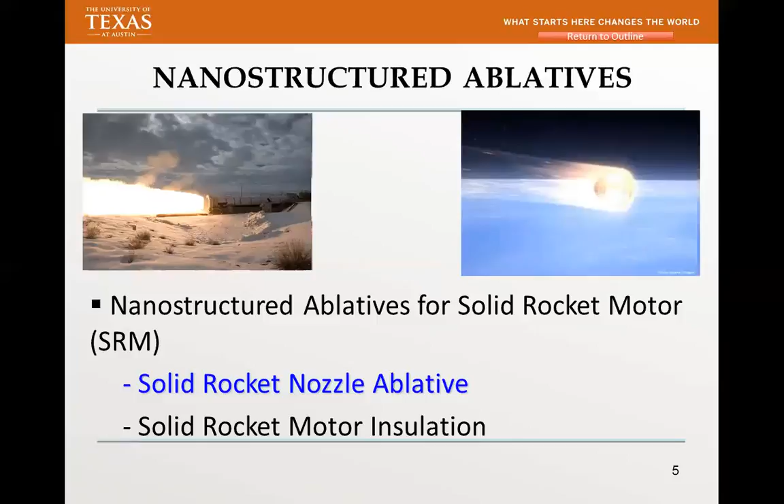These two research grants or contracts actually came from Air Force. A lot of my research has been funded by AFOSR - probably Pierre knows about it - and AFRL. They've sponsored a lot of my research for the past probably 15 years.

I'm going to give you some examples. We were developing a new class of nanocomposite for rockets - for rocket nozzles - and AFOSR funded my company to do that. The whole idea is, can we change the phenolic resin with very low loading of these nanostructured materials and use rayon carbon fibers to make a new material. That's the reason behind it.

Since I've worked in industry all these years, I work with Cytec Engineered Materials - we have the formulation and send it to Cytec, and they will scale it up. Cytec is now owned by Solvay. So what we do is everything in the lab, and we work with other companies that do the business of scaling up. That's the approach I'm taking - I buy all the materials off the shelf and formulate something nobody has done before.

If I do everything in the lab, who's going to take it over? The companies - Cytec Solvay is the biggest company in making ablatives. We have a very good relationship with them. Right now, this is one of the projects, probably from about 12 years ago.

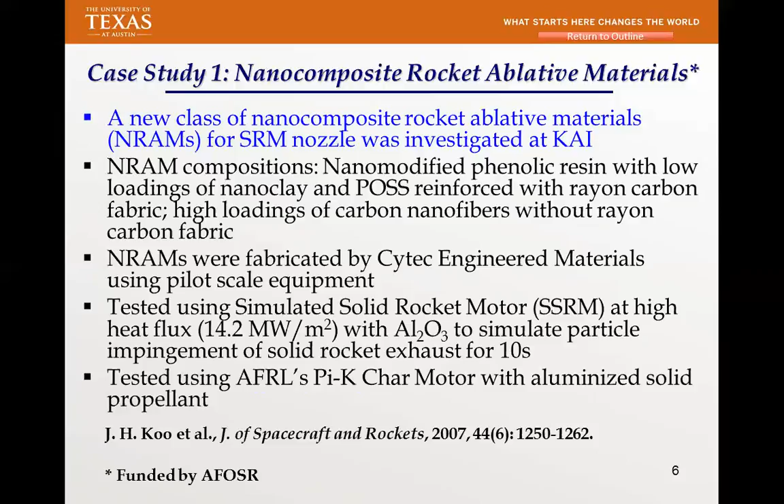So the important thing is we actually formulate resin, reinforcement, and filler. These are the different formulations we come up with using a phenolic - phenolic is the traditional material, actually made by Cytec. We always use a control, and then we change the filler using clay, using POSS, and also using carbon nanofibers. Those are the things we're working on.

So this is all done - all done at Cytec. We give them the formulation, and they will make it.

So we don't have what we call a scaling problem. If Cytec could scale it up, they could make us a product. That's kind of different between my research and a lot of my colleagues. I always find an industrial partner to make our formulation.

Okay, I want to concentrate a little bit on what we call significant results. You can see I have four plots here. Density is the most important thing in all the material that we develop, because you have to put it in rockets, certain things. If you have a very high density material, you're not going to fly, period.

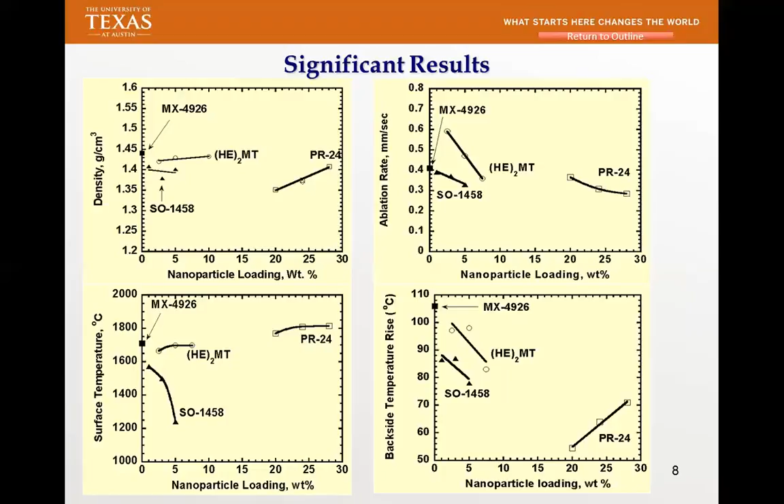Another one, we publish a lot - that's why you could actually find these citations. This one is also jointly funded by AFOSR as well as AFRL in Edwards, California. The first one had to do with rocket nozzle, the second one had to do with insulation. So we started actually using material - these materials came from Bayer, the thermoplastic elastomer, and then we use the clay, came from industry. We also use multi-wall carbon nanotube, came from Arkema.

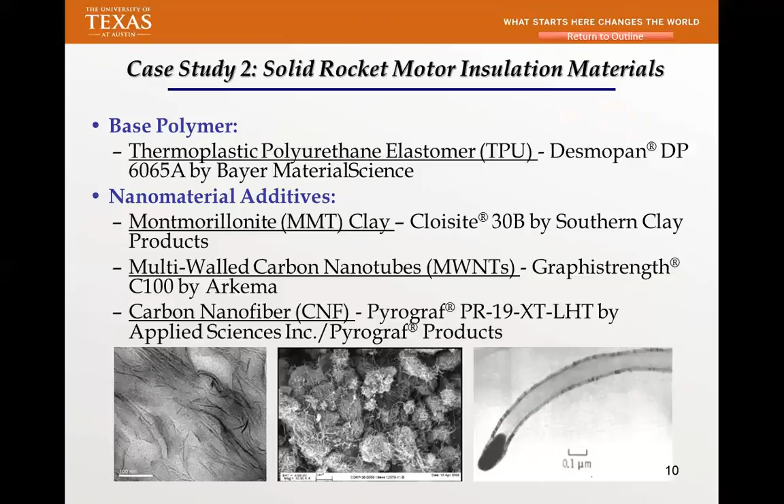We use carbon nanofibers from a French company that came from applied sciences. So that's what we did, and we compounded using twin screw extrusion. We have all these different loadings because we don't know which one is better, so we actually had to do a loading study from 2.5 all the way to 10 with these different nanomaterials.

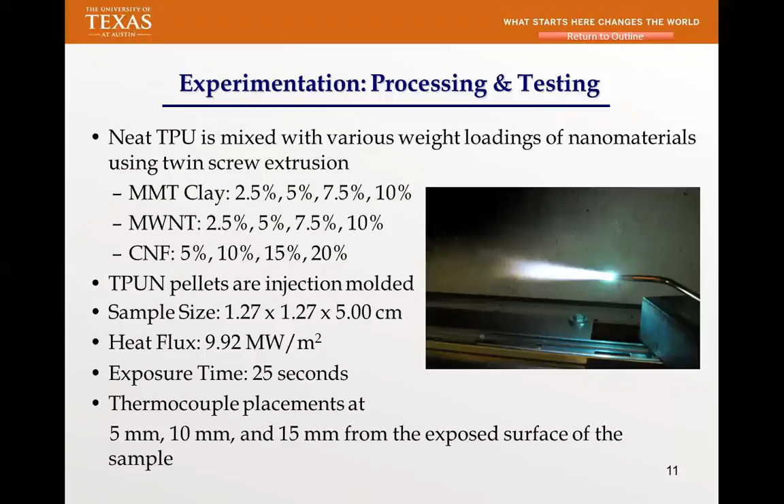After we compound all these, we test using a very high heat flux. This is our own first generation oxy-acetylene torch that we use, and we were placing thermocouples at different ends to get the temperature gradient during the test. I'm trying to show you some data, but I'm not going to explain the data in detail, I'm trying to show you the methodology, how we solve a problem.

We collect all these data and start looking at recession. Of course, the lower the better. We know the loading, and we plot everything, and find out which one gives us the best ablation resistance. That's one thing we look at.

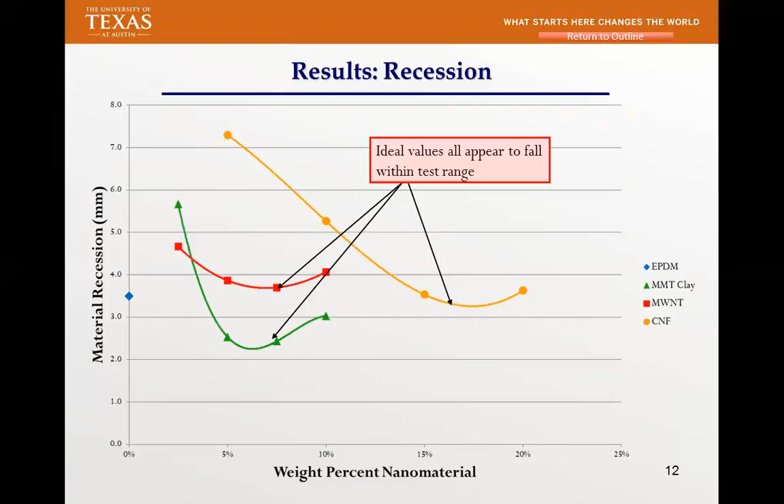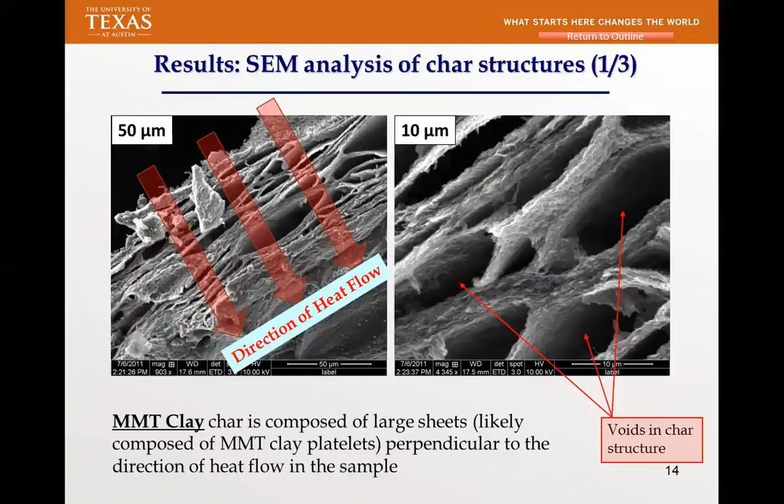We learn it from SEM for the post-test material. So this is what we saw for char structure for clay. The difference is they actually have all this clay that will stop it. Clay is ceramic, and it works really well for ablative.

Next one I want to share with you is multi-wall carbon nanotube. It's very different in terms of structure from clay. This very small multi-wall carbon nanotube is roughly 20 nanometers in diameter, so you form what we call a carbon network, while the other one actually forms a ceramic shield. Very different mechanism, and that's how it really worked for the ablative we developed. This one is actually 10 microns, and this one is even higher magnification.

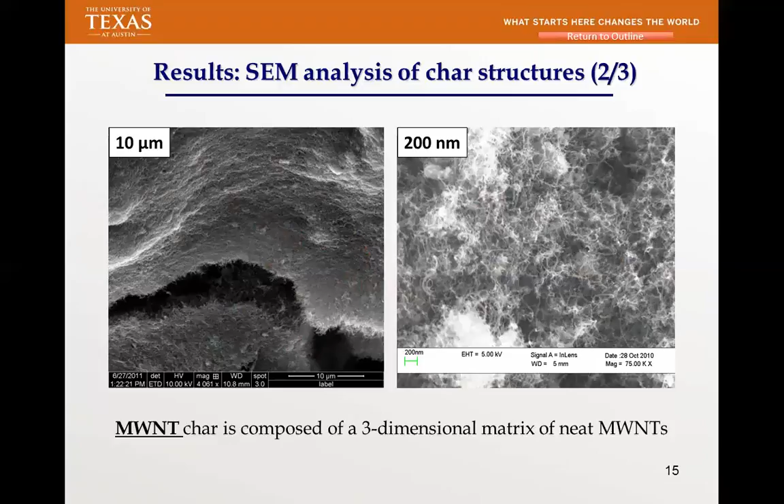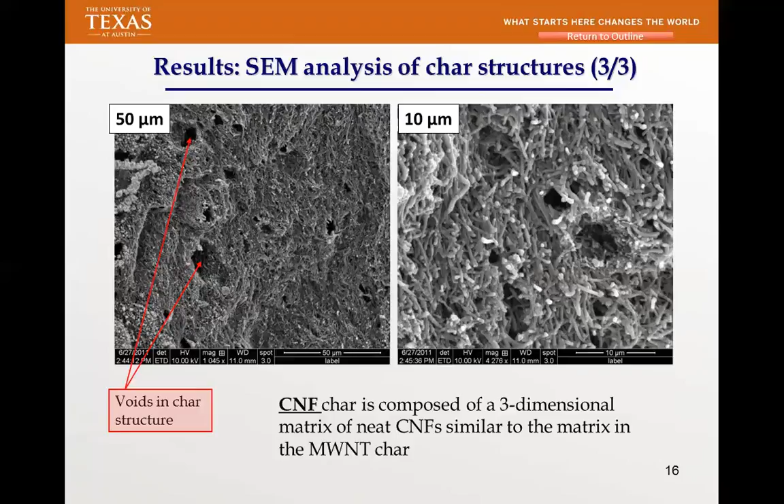So next one I want to show is... underneath here, this is carbon nanofibers, 150 nanometers in diameter. You can see there's also the mechanism of a carbon network, but they're bigger, 10 times bigger. That's why we look at, examine the structure and learn about the mechanism. That's what I tell my students to do. Once you learn about the mechanism, you could actually solve another problem.

Once you learn about the mechanism, you could actually solve another problem. Well, this is actually very new, this has just been published.

This is some work that, and I need to brag a little about it, this kid is an undergrad, he just graduated under me. He was able to write a journal paper and it's been accepted. That's how I work with my students. Of course graduate students are important, but some undergrads are phenomenal. I worked with him and he got a paper published, just came out last month in the Journal of Spacecraft and Rockets. So he did that.

We were looking at experimental characterization of a new material using a resin that is polysiloxane, and using silica. So that's what we did, and this has been published. I'm showing you the methodology, how we start from the lab all the way to testing.

So why are we doing that? Because it's for TPS, thermal protection system. This resin was developed by a company, they came to me and said they would like me to make this material into a thermal protection system. So we did all that, and that paper became a marketing tool for them.

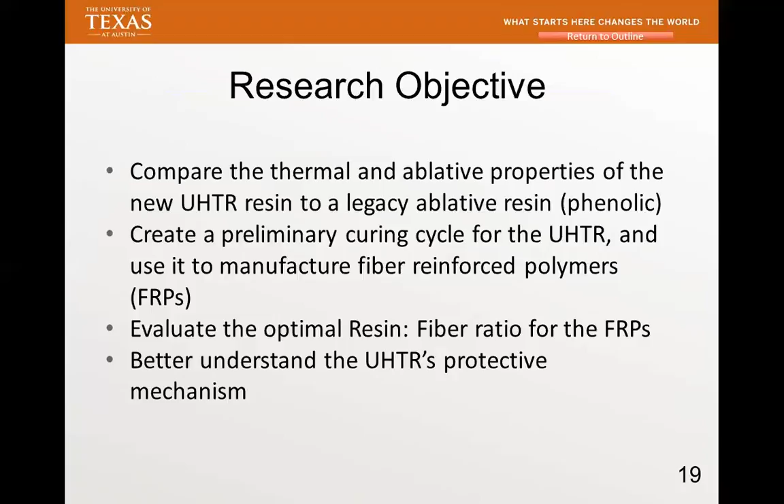So this is what we did, and we compared with silica phenolic, which is a material that has been around for a long time, also made by Hexion. We always have what you call a control, because if you mix something up, how do you know it's good? It's not that Dr. Koo said it's good—you need to compare everything in industry. This particular material has been around for 40 years, so we compared with that, and we were able to make it in our lab as well as get the material from Cytec.

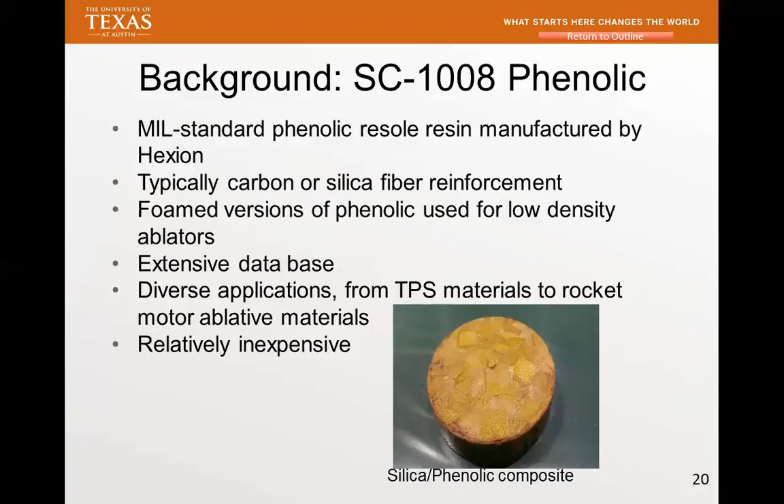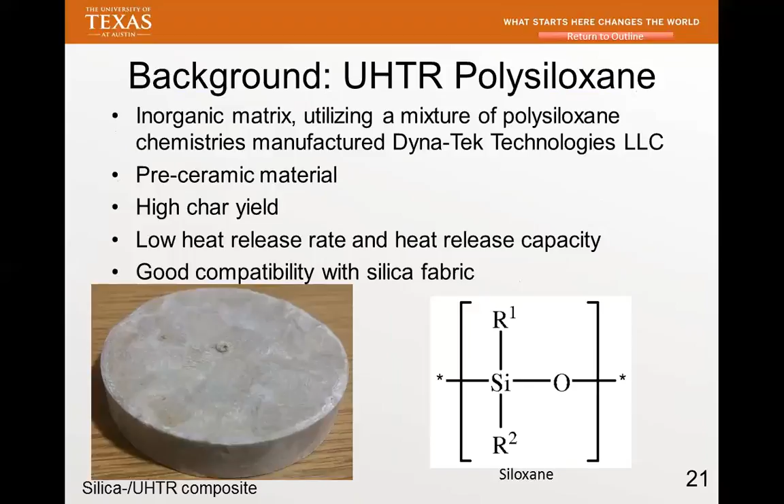These are the structures of the silicon polysiloxane, and this company provided material with very high char yield. We'll use the same methodology I talked about earlier: TGA, look at the char yield, look at the MCC, and look at heat release rate. We'll actually measure density, and the difference is we will also use an oxy-acetylene torch to find out ablative properties as well as performance.

And we compared every one of those that we got from the industry, so then I know. Take a look at this char yield—take a look, this char yield coming from phenolic is lower than this particular resin. Using the same definition, it's 86%, substantially better. Char yield is only one thing that we look at, but if you have a high char yield, you're going to actually maintain your ablative performance. So that's what we start looking at.

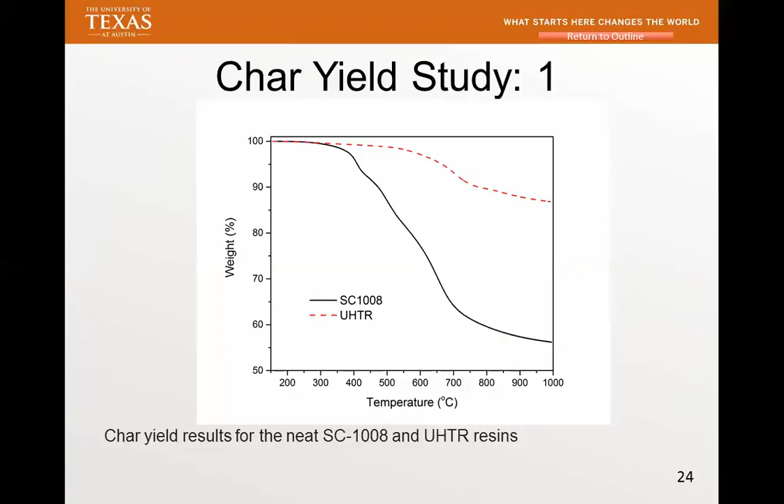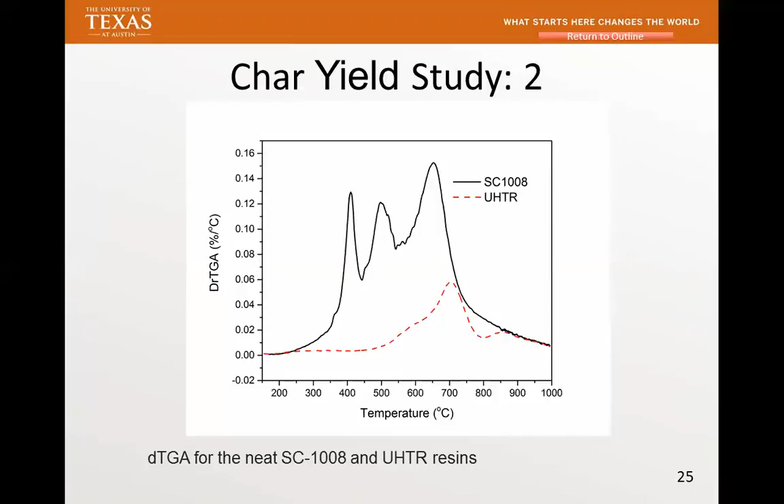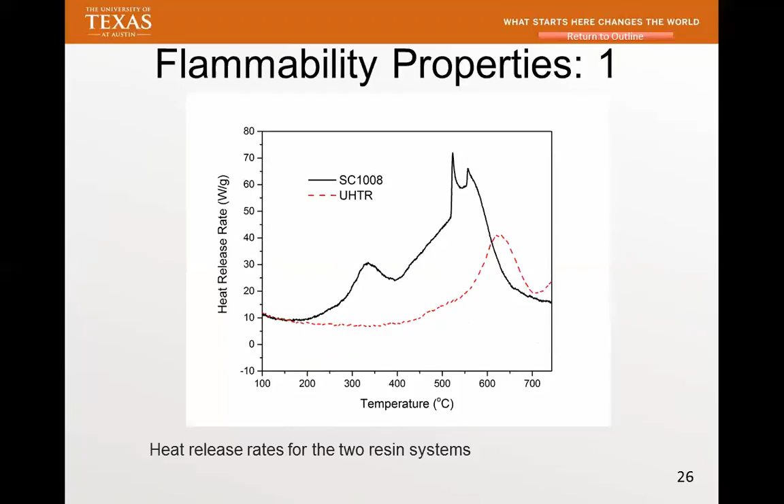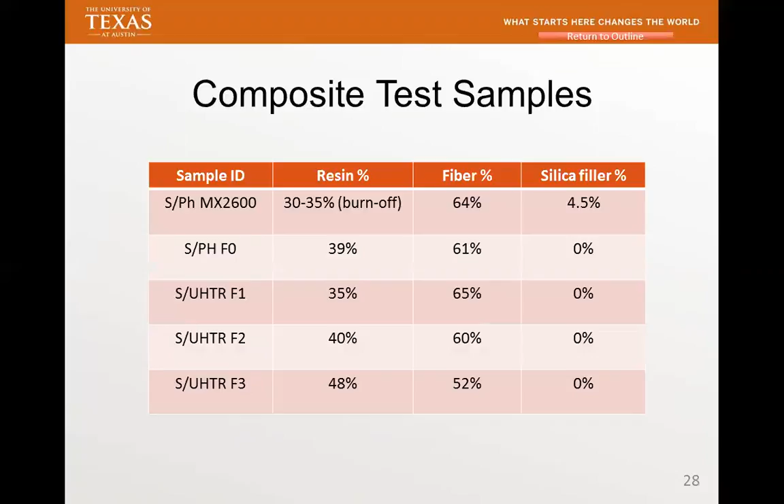So these are the ones that we are doing in the lab. And the density—well, it's showing that all of these have lower density than the control, MX2600. So if we have a low density with better performance, you have weight saving.

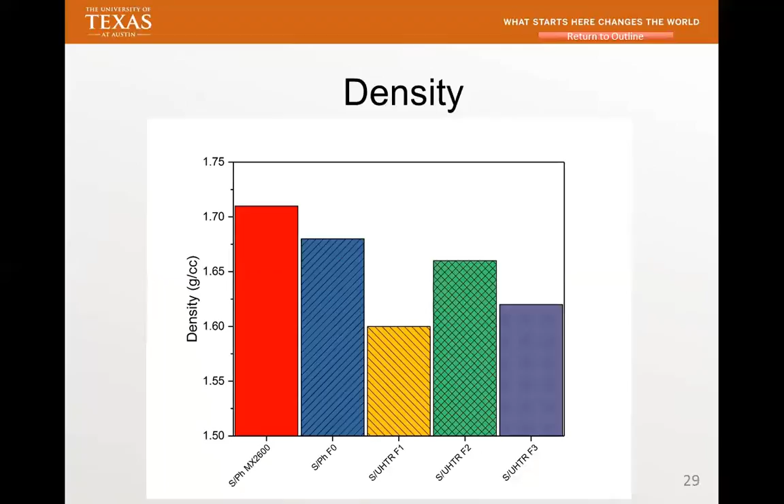So we do TGA—first I did it for the resin, now we're actually doing it for the composite. Take a look at the composite—it is very, very high, 97%.

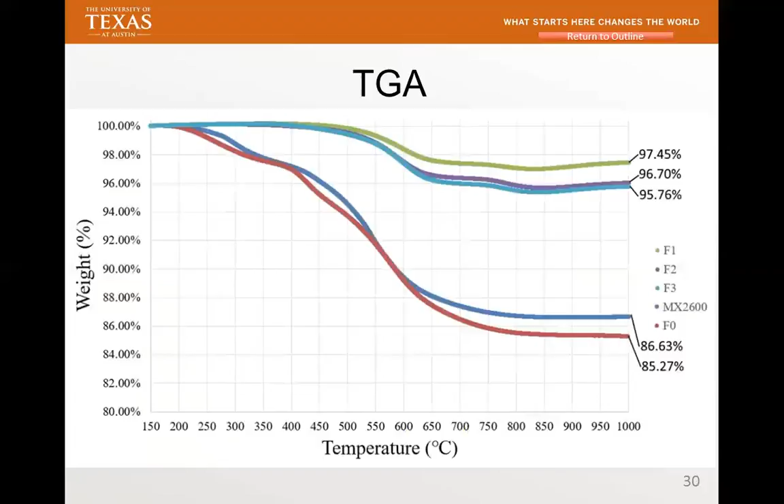That's extremely high. So this is what we do using the oxy-acetylene approach. We calculated the fuel ratio as well as measured the heat flux using a Gardon gauge, and we expose it using 1,000 watts per cm squared and a set exposure time. We have a carbon shield blocking the flame wrapping around. So this is what we did, and this is all presented.

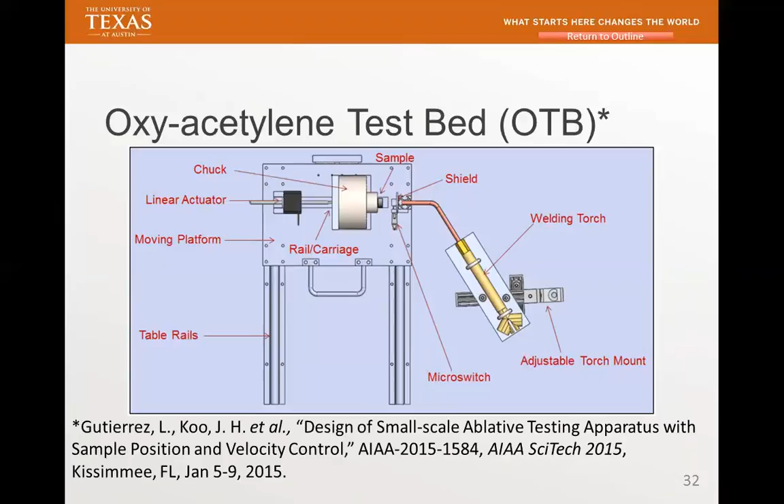These are my K-team capstone team who designed all these, and as every capstone project, we present a paper. This was actually done in 2015, and it was presented as an AIAA paper.

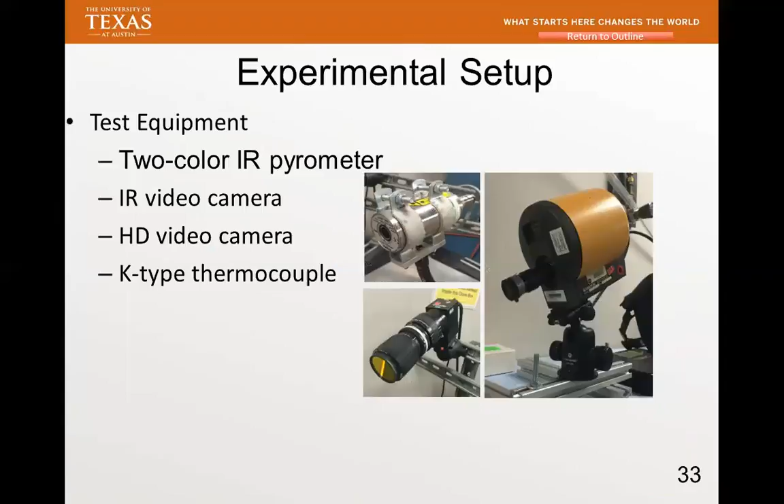We have these instruments that came from NASA: an IR camera, a high definition camera, and a two-color IR pyrometer. We examine the surface of each one, and this is how it looks before and after.

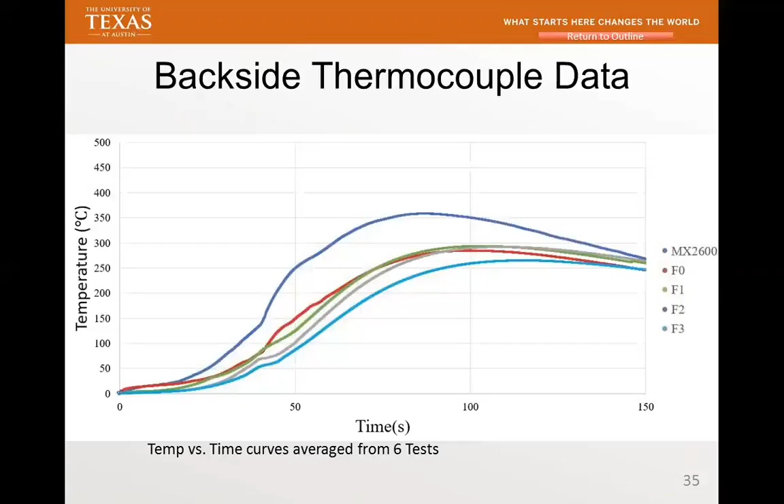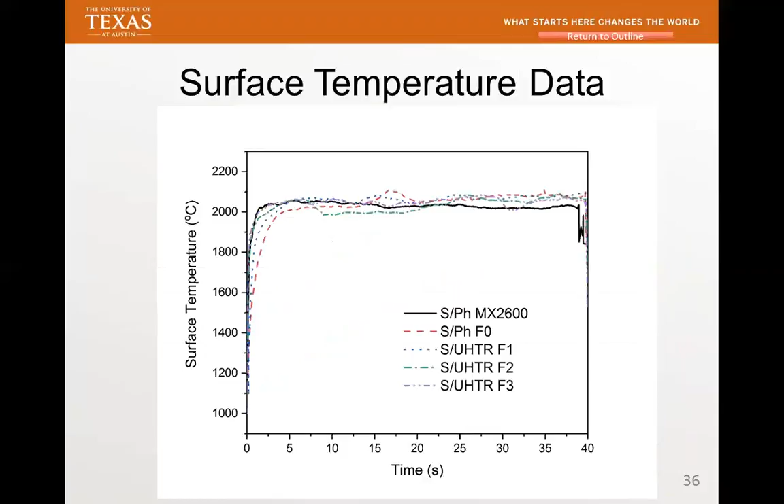We have a two-color pyrometer, so emissivity is not an issue - they cancel each other out. This is what you see, very high temperature, 2,000 degrees C during the test. And this is the recession rate.

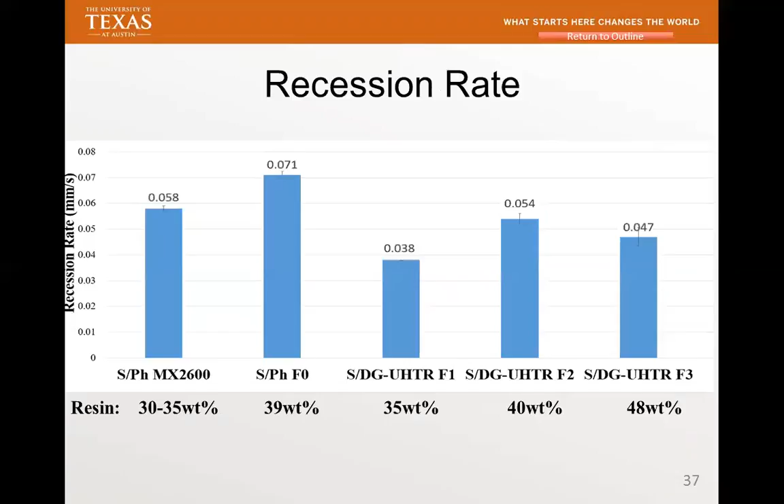Lower is better. You can see that this is actually the best formulation we have compared with the industry standard. Heat soak temperatures are all lower than the industry standard. We also measure the mass loss, all of these.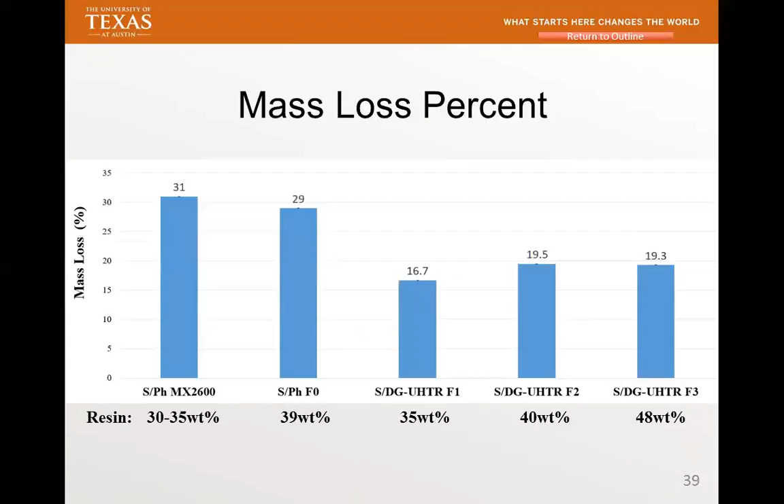That's what we call developing a methodology. If every student follows this methodology using a different material, they get an answer. That's why we have numerous publications, because we develop methodology - this student uses this, another student uses that, but they're using different materials. We have all the capability in our lab to do ablation as well as flammability work and mass loss.

Oh, this is a video. Can you do that? Somebody help me. See whether you could do this video - this video is very interesting. It's an IR video, and you could see the material versus the one that we use. You could click both of them almost at the same time. Oh, sorry.

So you're seeing this is the one for IR, the surface. The different colors will tell you how hot it is - in the middle is the hottest. Now it's showing actually in power. This one is for MX, the industry standard. The other one is the one that we made - this is Formula 2.

Is it done? Oh, it's still going - you see, it's 40 seconds. Okay, we capture all that. So now it's gone.

So that's what we do, what I call advanced diagnostics - we capture all the things and we start analyzing that. And in the paper, can I show the video? I told them to just cut out all the frames so you can compare, and this is what we're doing.

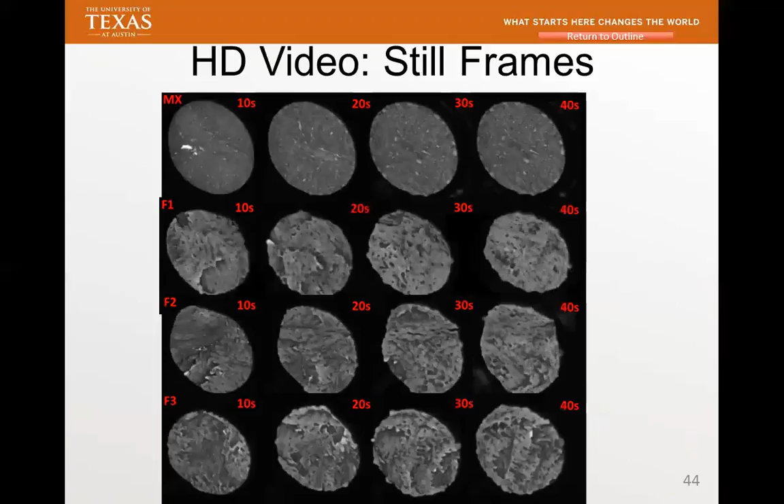All these measurements, and then we got still frames. You want to know more about it? Actually, the paper will describe all these things.

Okay, so these are the ones that we did for looking at char zone area A, B, C, decomposition area, pyrolysis area, and virgin area. This is what we did for the material, very, very detailed analysis.

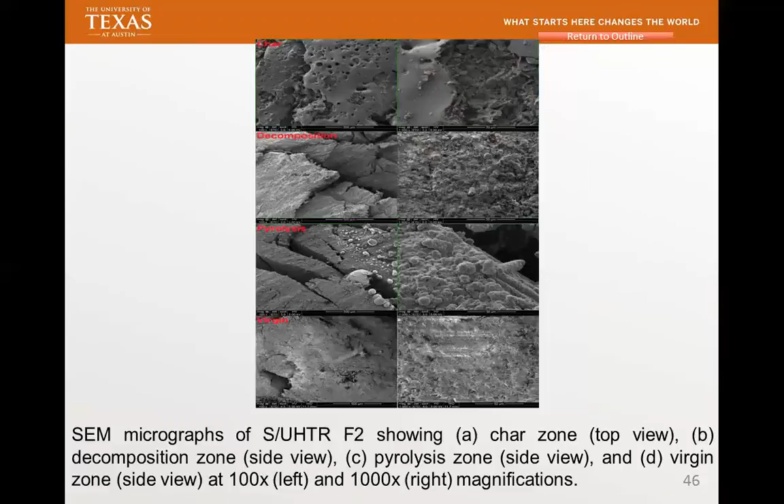And mind you, this guy is only an undergrad. He just graduated while he's working. So in conclusion, we did all these things, and that was actually a very good material. This material, I'm using for a new Navy contract. I have a new Navy contract.

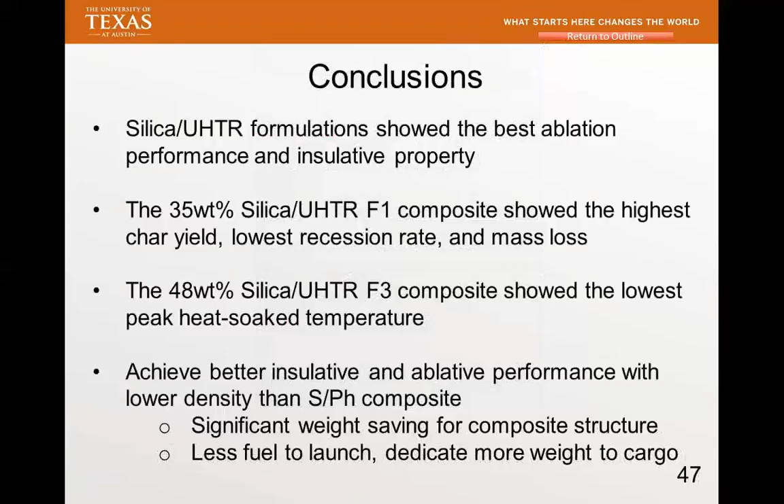This is one of the materials that we're going to use. So I'm going to talk about char yield a little more. These are different materials that we have, and that's what I call the char yield. All these materials came from the industry, came to my lab, and used the same definition. Take a look at the char yield of the one that we did, very high.

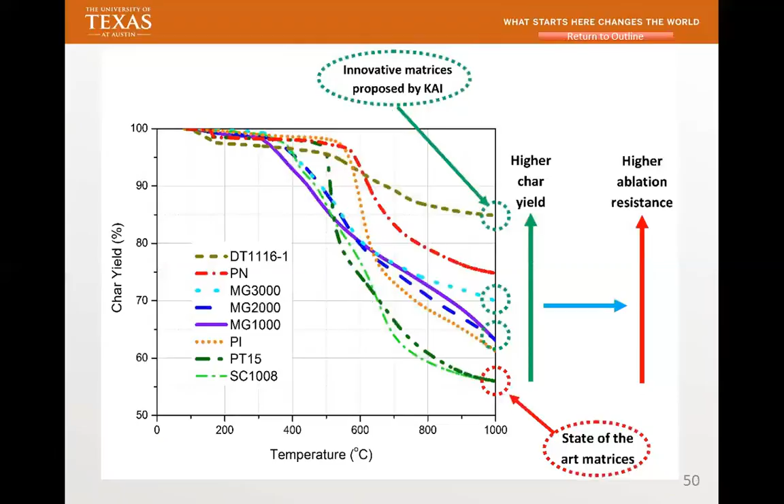These are what I call state-of-the-art resin systems. These are commercial, not somebody from the lab. I do not take somebody's developmental work. These are all I could buy. If I had the money, I could buy a truckload of these. Some of them are very expensive still, but I could buy them.

So we did all these, calculated the decomposition temperature, looked at the char yield, and compared which resin is better. The one that came up on top is the polysilicon.

So we did all that before we do all these, and then we also do kinetic calculation. We do actually TGA at different heating rates, always in nitrogen. I don't want to do it in air because with nitrogen you decouple the oxidation effects.

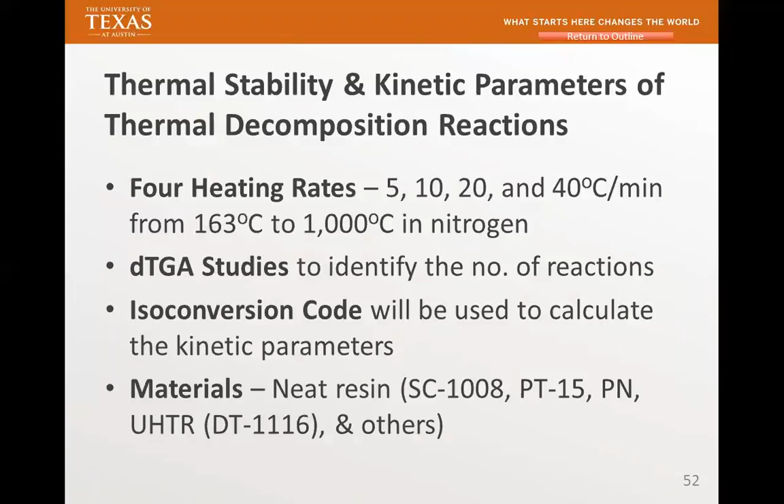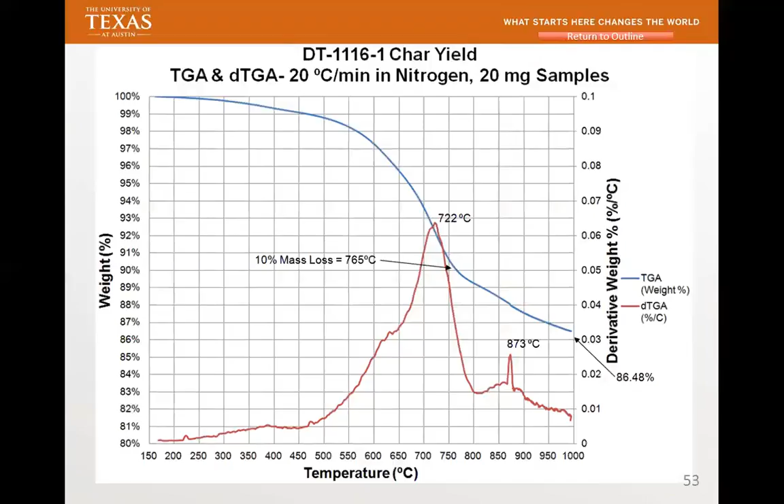Okay, you do all these, and then we fit it into another computer code that we developed. It's called isoconversion, which is actually used quite a bit in academia. And we come up with all these, and we plot all these, and every one of those was actually done for my lab, by my students.

We calculate all these, and then basically we do experimental work. Now we're doing a little bit more theoretical work to understand.

I think this is interesting because Jonathan is also actually an undergrad. So I'm going to show you some of the things he's doing. The two materials are actually supplied by NASA, PICA, and Avcoat.

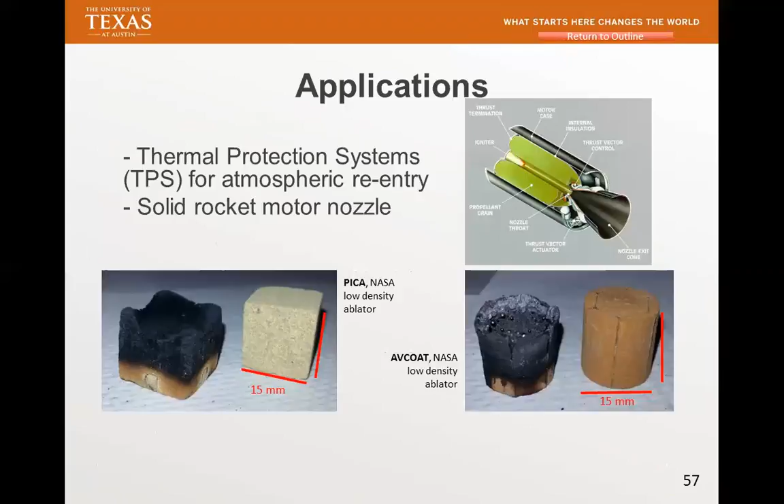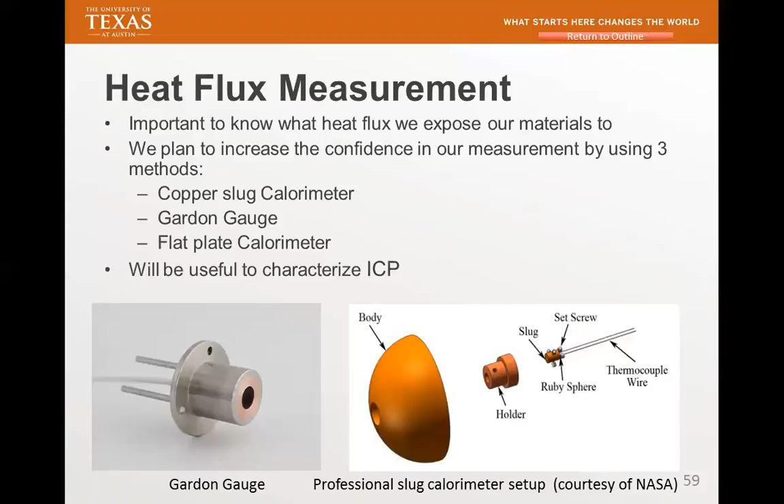We have this thing, and we measure using different calorimetry. The one that we depend on a lot is the Gardon gauge. We plot it and look at the heat flux versus distance. From there, we use that particular distance and test the material. So we could go up to very high heat flux, or actually low heat flux.

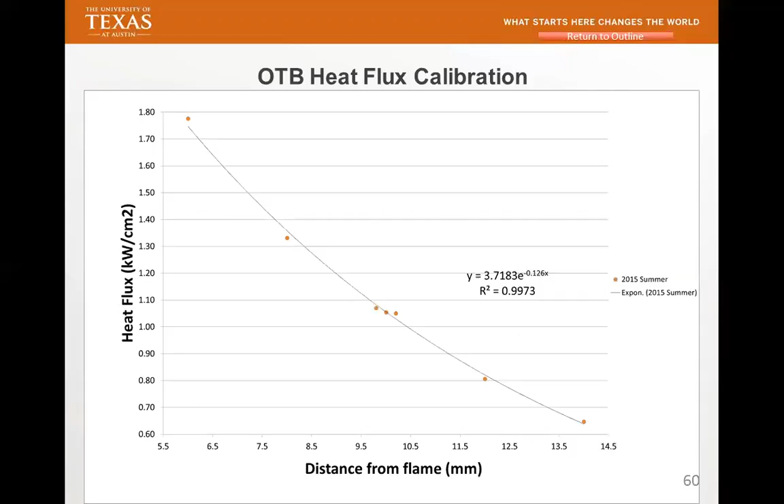We measure all these. This one, can you show the video please? This is actually quite interesting. It was all done by undergrads. So one side is the high definition, the other one is IR. You could compare it, all the frames.

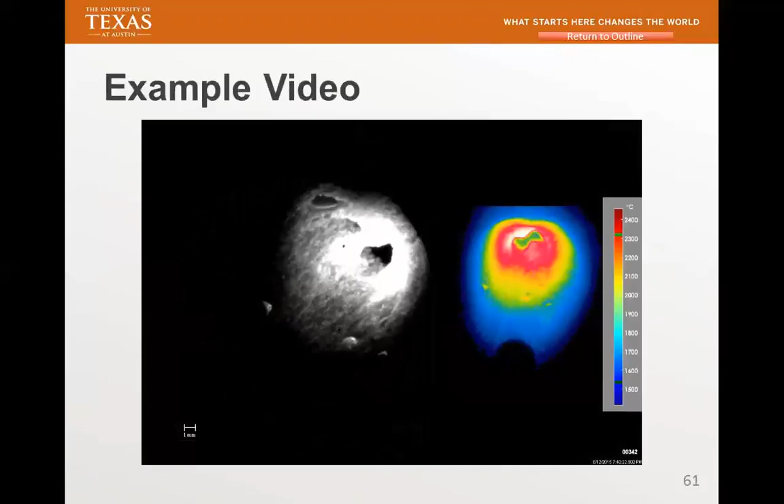Okay, so we did all these, and this is what we call an in-situ sensor. I'll give you another little section on this where we designed it. It was funded by AFOSR. It's also basic research. We develop all these and use them in our research.

So what I'm doing is getting funding from different agencies. They pay me for this, pay me for that, but I put everything together to analyze ablatives.

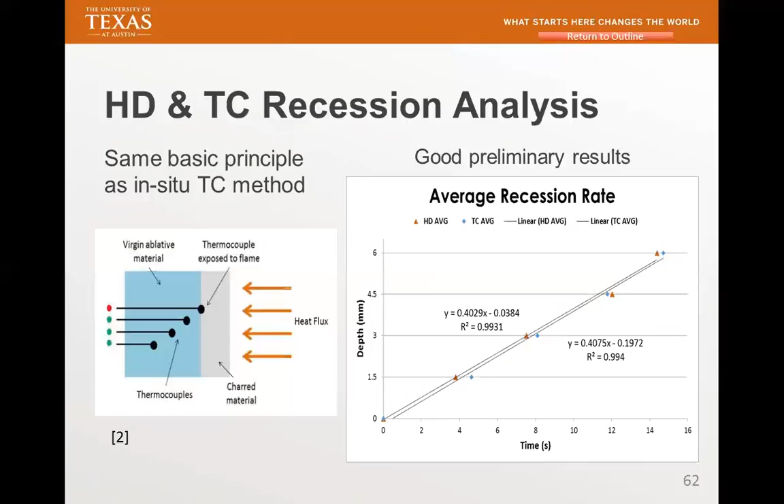So we did all that, and the same thing, we actually use IR to calculate all these. These are different platforms that we could look at. They came from NASA, actually the IR pyrometer.

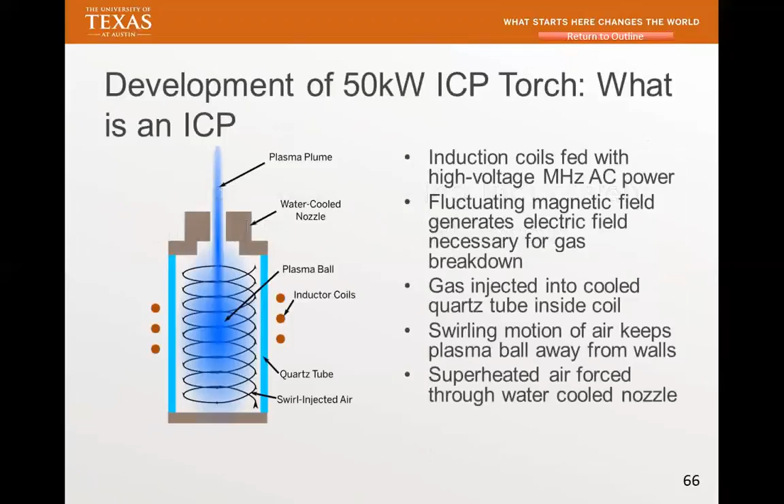So this one is very interesting. This one is called ICP. It's funded by NASA Johnson. It's actually now at UT. Basically, most people use ICP to do re-entry vehicles. So Johnson funded us and my colleague in the aerospace department to actually build this whole system.

Okay, and this is the ICP. It's currently at UT Austin, and we are now using that to test the NASA project. So these are the instruments. Everything starts from ground zero. We were able to do all that.

I'll give you a video. Okay, go back. How can I get the video? Please. Okay, this is the flame now. Self-explanatory. This is actually a PhD dissertation.

So here's a flame. We're heating the air using induction coils.

And you will see all these instrumentation, and then later on you have a swing arm and swing your sample in there. Okay, I borrowed this actually from Benton.

He's defending his thesis this Friday, and I said you pass. Don't want to call in at 1 a.m. in the morning to sit in this station.

Okay, so this is the flame, and you'll see a swing arm coming in right here, the sample.

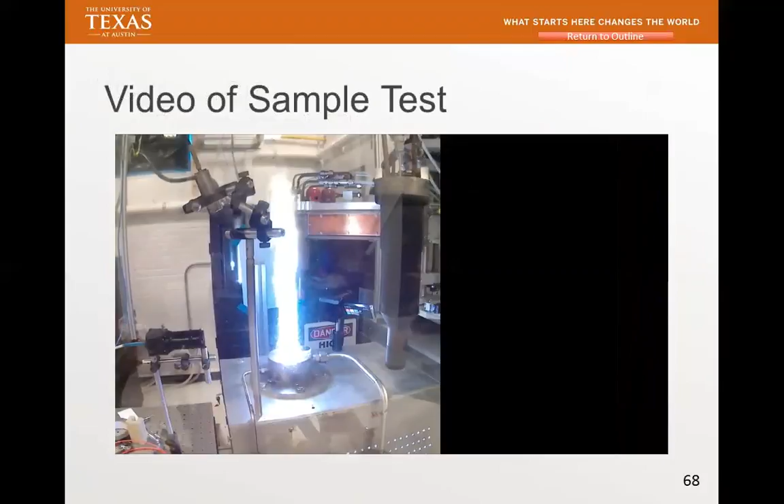Something is missing. I think the video, something is missing. Is it come out? Can you play back? Because you're supposed to see the swing arm swing in, okay, and you see actually the sample in the flame and then swing out, and you see a lot more things.

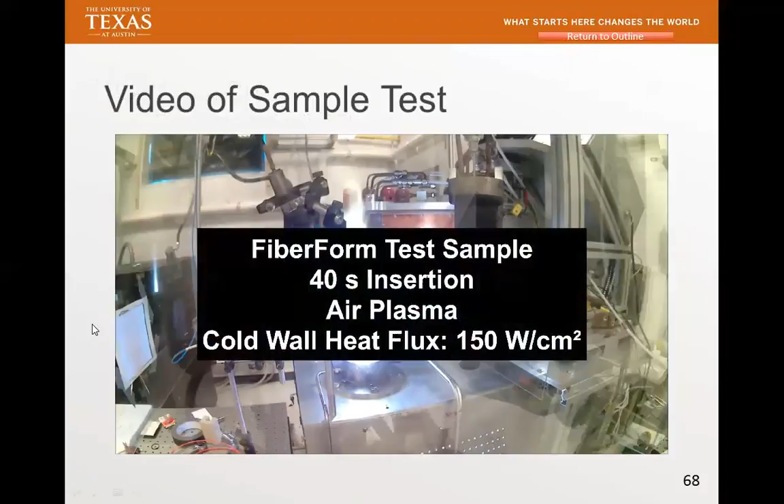Somehow, because the swing arm was designed actually by NASA, so you make sure that the flame is steady state, and then you swing in the arm, you will be able to capture using actually this, using the optics in there.

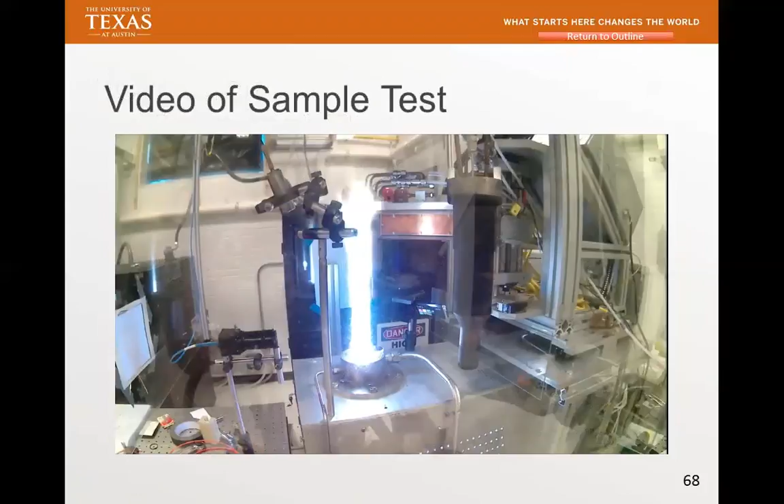Okay, but this is what you do. We have a swing arm and swing it, and then you could capture for 40 seconds. I think he was using 40 seconds. Okay, so that was done, and this is what he described as a traverse table. They will be able to move that.

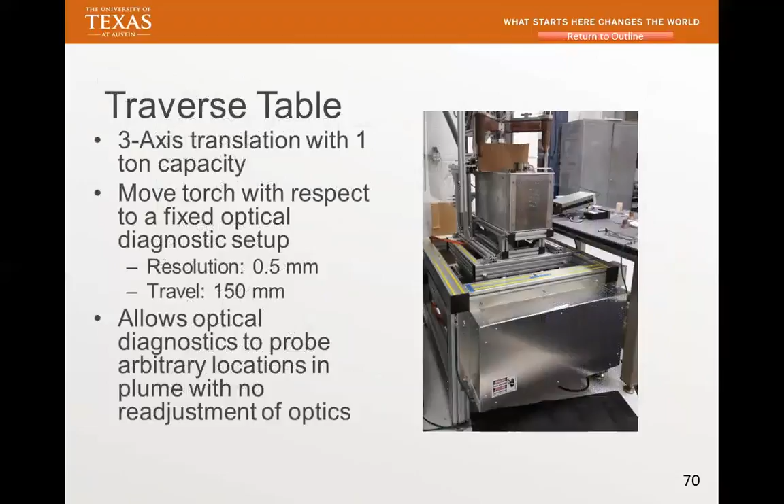And this is how you have an insertion mechanism that was developed by Johnson, and we were able to do all these. That's actually part of the PhD dissertation that's funded by NASA.

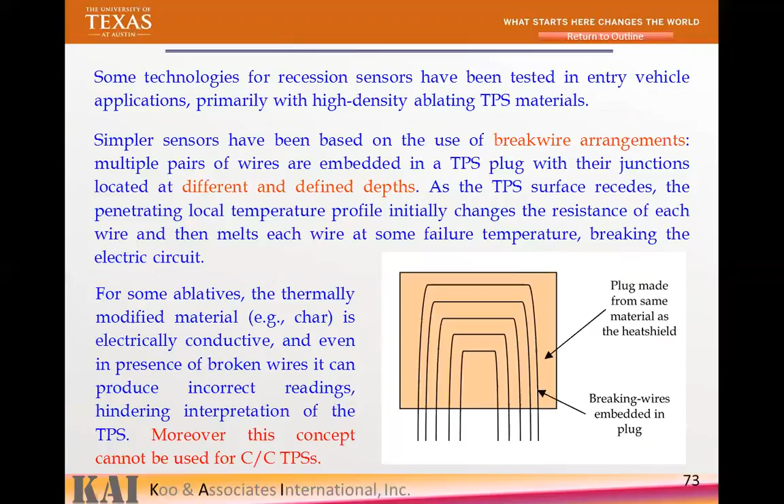Okay. The next one I'm going to show you is the in situ sensor. These are all published. The whole idea is you actually have what you call a breakwire. This is the simple solution. You drill holes from the back, and actually you could space it where you want, but the sensor is 0.25. I bought it from Omega Engineering.

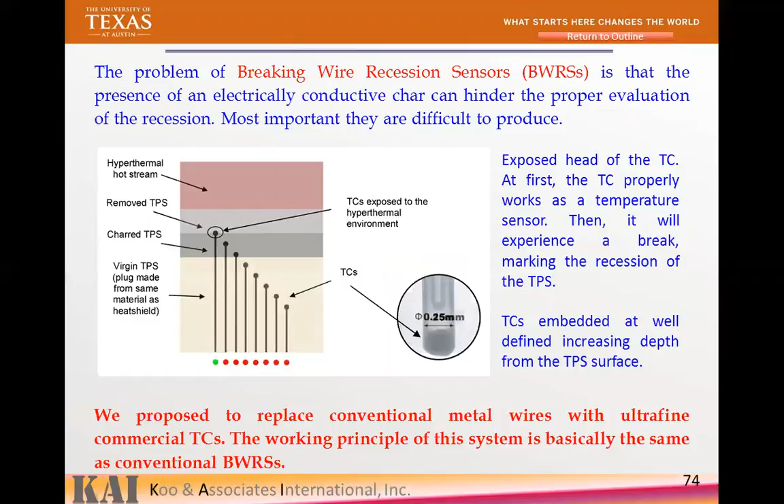Anything that I do, I buy it. I don't want to go to somebody and say, can you develop something for me? And I cannot mass produce. Okay, so this is all made actually by us — we drill holes and use NASA material and make it.

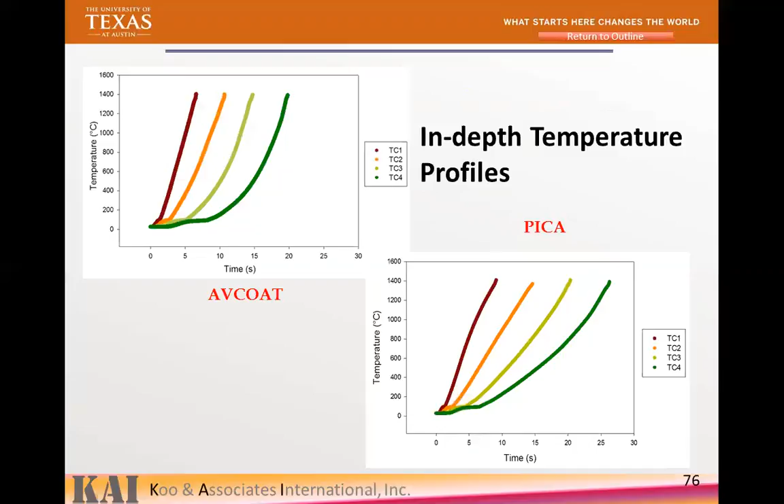And these are the thermocouple readings from T1 to T4. T1 is the closest to the surface. T2, T3, and T4 are different distances. So we are able to measure all these and actually calculate. This is AVCOAT and this is PICA, and we will be able to calculate all these and plot it and have an in situ ablation rate.

Okay, so those are the things that we have been doing, and we also measure the IR surface, and these are all actually in the journal paper that we just published, comparing all these with different materials. It's not just one material we have done. We have done numerous materials, and it's all coming from the density.

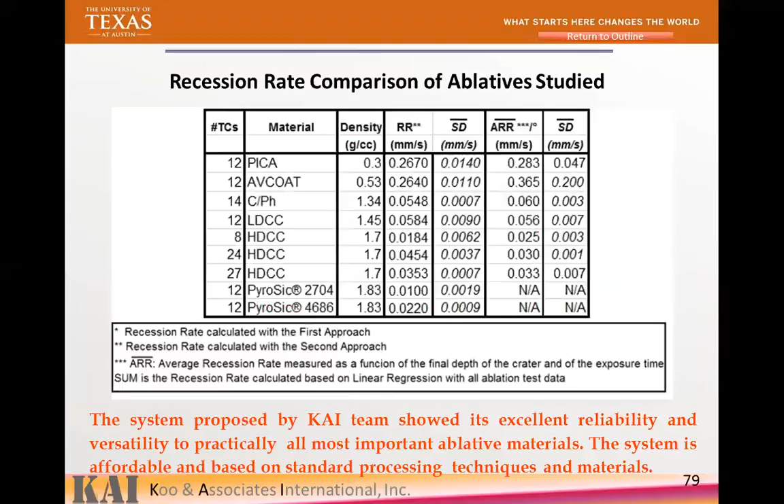See, the top one is 0.3. We could go all the way to 1.83. So we could test all these materials using this technology, and it's very reliable. Okay, so that's what we did.

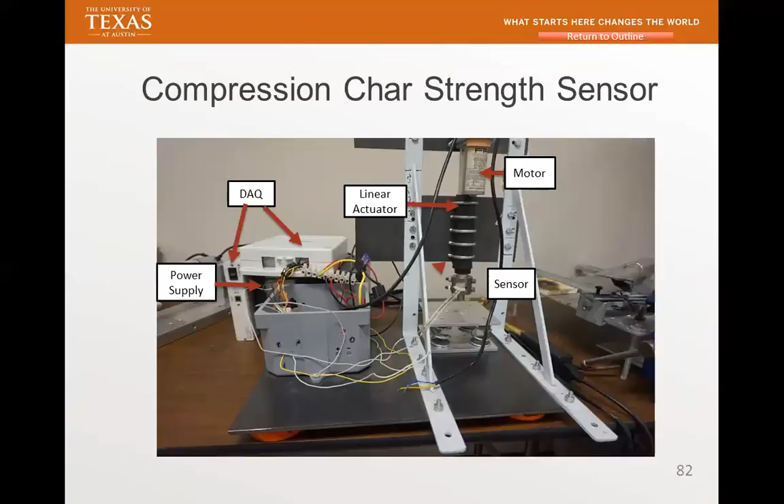And the next one is ablation sensor, char sensor. This was actually all developed as a K project. Okay, and we measure all these homemade, and the important thing is we were able to develop methodology.

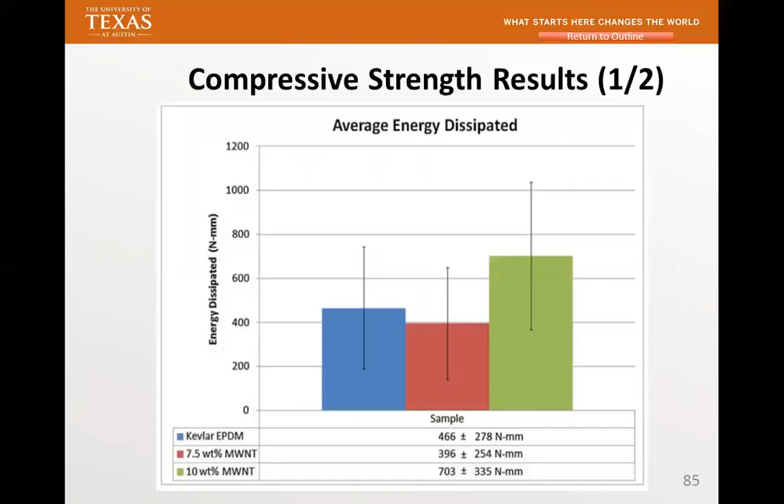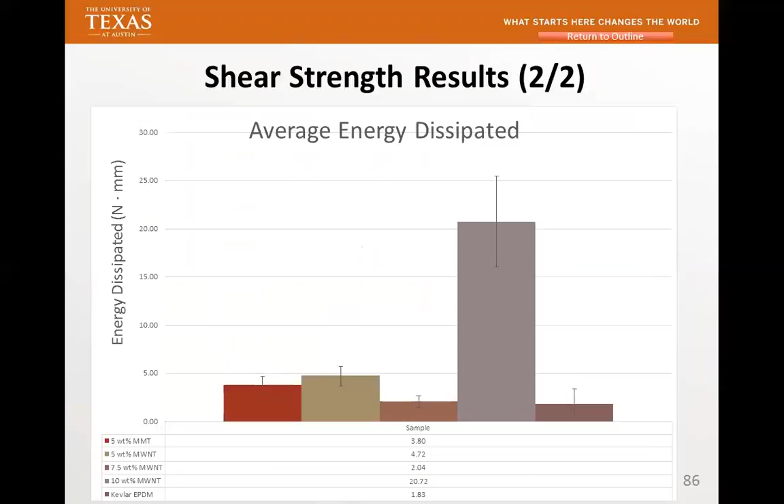Okay? We did all these, and we calculated all of that, actually documented in journal papers. So okay, so this is second last.

After we did all these, the important thing is, well, we need to know the thermophysical properties. Okay, well, this is a whole list that you need to characterize in the char state, virgin state, before you could do simulation, and that is expensive.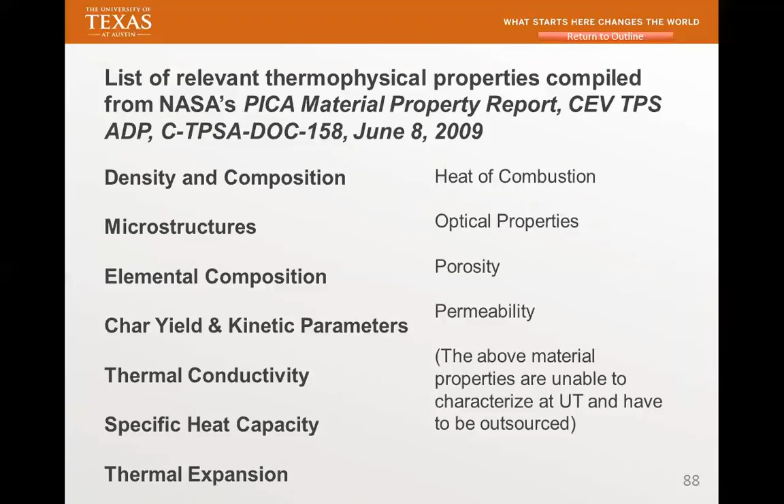Okay, so what we did, this also came from a NASA report. That's what they do for PICA. PICA is the material that's been used by NASA a lot, and they have all these characterizations. On the other side, we cannot do anything on UT because we don't have the capability. So if you do all these things, you go into modeling.

All these CMA, FIAT, CHAR, all these computer codes, these are ITAR computer codes. It was given to us, and all three of them actually came from NASA. The first one, if you do modeling, it has been around for a long time. The newest one is CHAR. You could do 3D modeling with it.

So that's what we do with all these, using the data that we collected at UT, and we start doing some hypersonic profile measure, like simulation. But we start with 1D, and we use CMA and FIAT because CMA and FIAT are 1D. Those were developed a long time ago.

CMA was developed at least 40 years ago. FIAT is a bit newer. We get all these, and we actually use the data that we collected for the material that's been characterized. The four materials that have been fully characterized by NASA are PICA, Avcoat, carbon phenolic, and I think there's another one, I forgot which. The other one is silica.

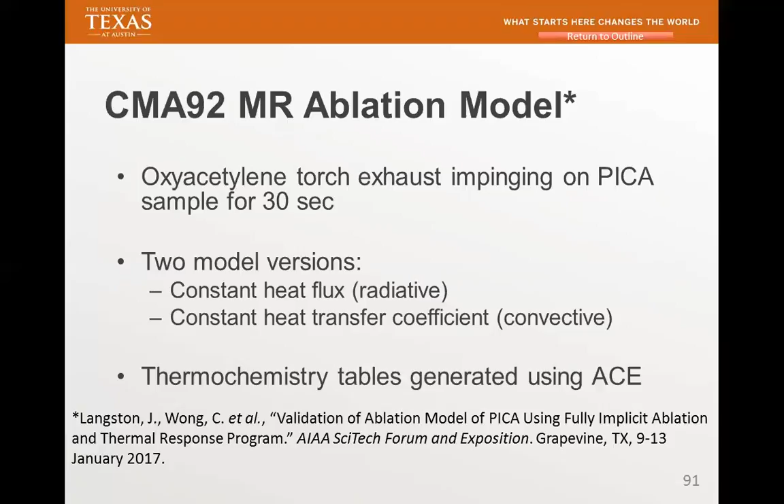I think they're different, one is not actually 1D. Second thing, we don't actually know the heat transfer coefficient of the oxy-acetylene torch. Those are the two major reasons. We're now trying to do all these and go back and do more modeling. I think we need to match some of these experimental and theoretical results. Then we have confidence in the material response model.

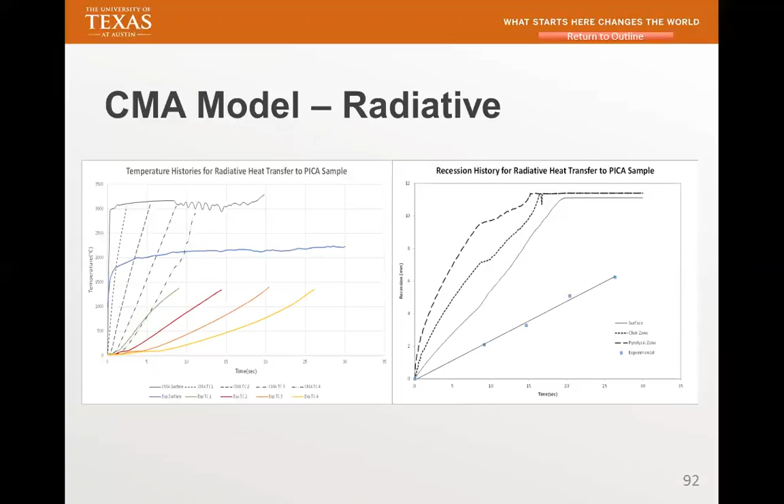So these are the ones where we only consider radiative heating, and it's not good. Okay, and the last one I want to show is actually John's master's thesis. He's finishing up, and as a matter of fact, he's going to graduate this semester. This is what we did using modeling for PICA.

We have all these 1D results using CHAR, and we are matching the surface recession, surface and in-depth temperature. We're using a code developed by Adam Amar. He developed this code. If I'm working with NASA, I use NASA code. If I'm working with Air Force, I use Air Force code, because they are different.

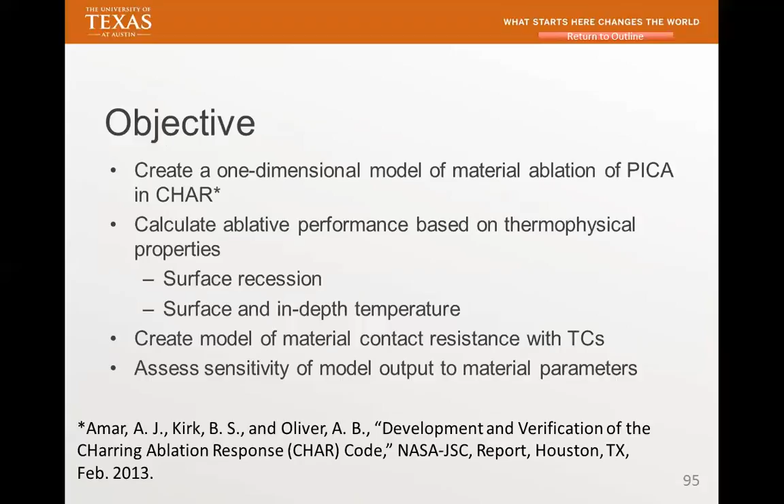Because I have different customers, I cannot just say use one computer code and I'll solve all my problems. No. Now I have a new contract with Navy. Navy has no code that they develop, so I'm going to use the Air Force code developed by Air Force.

Okay, so we did all these. This is pretty much the input we need to put in order to do 1D, 2D, and 3D. 1D is not really good, we cannot match the experimental data. And now we're moving to 3D, and 3D is not as easy as I thought.

I'm putting more people in there to learn, basically solve all these energy equations. See, I'm not in the business of developing computer code. I'm in the business of using other people's computer code to come up with a material response model and see whether we could predict some of these performance outcomes. Okay, so that's what we're doing.

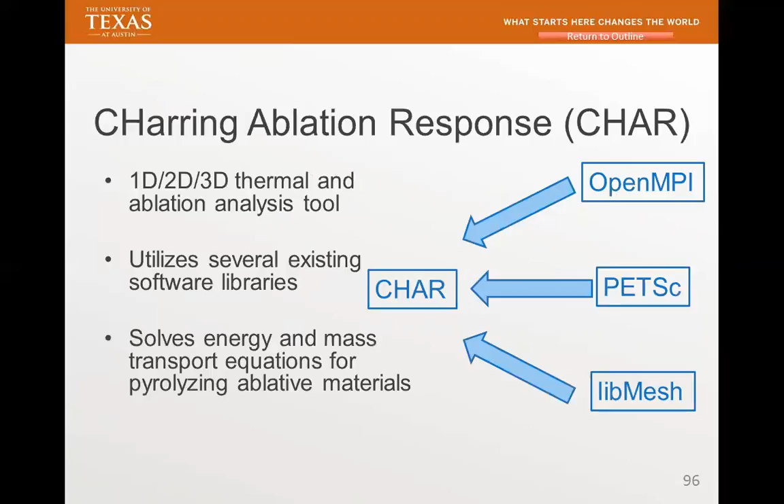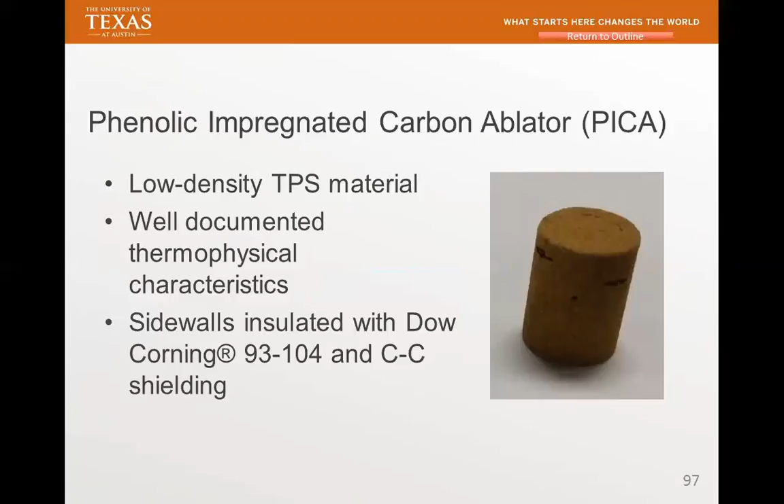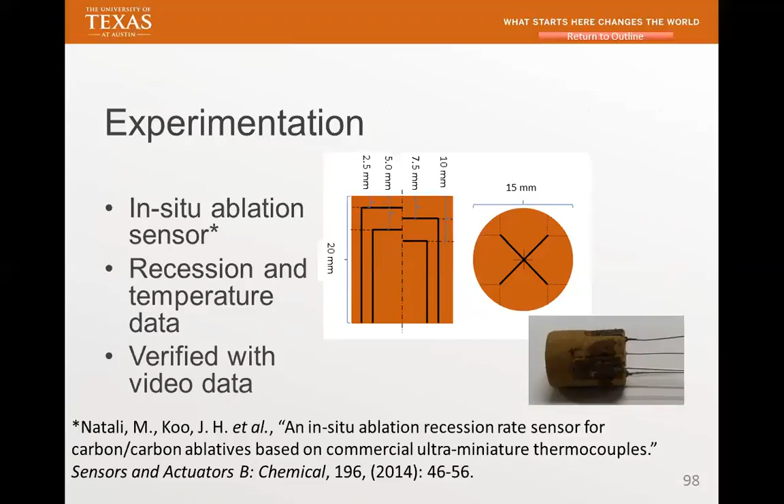And I think we are the only group that's doing materials measurement and also doing the modeling. So that's why we have a pretty large group. We're using PICA, and we're using Dow Corning to shield it, and we came up with a different in-situ ablation sensor technique, different from the one we used before. We developed that a while ago, in 2014, and my student is actually finishing up his master's thesis.

So that's what we need to do 3D, because that actually is a 3D problem. You cannot use a 1D model to do all that because there are neighboring effects. So now we're going to do 3D.

Char is... there's another computer called AFOSR developed, it's called Hero. You could do 3D because a long time ago our numerical capability was not so good. Everything was done in 1D. Now you've got high-power computers, so everybody's going to go 3D.

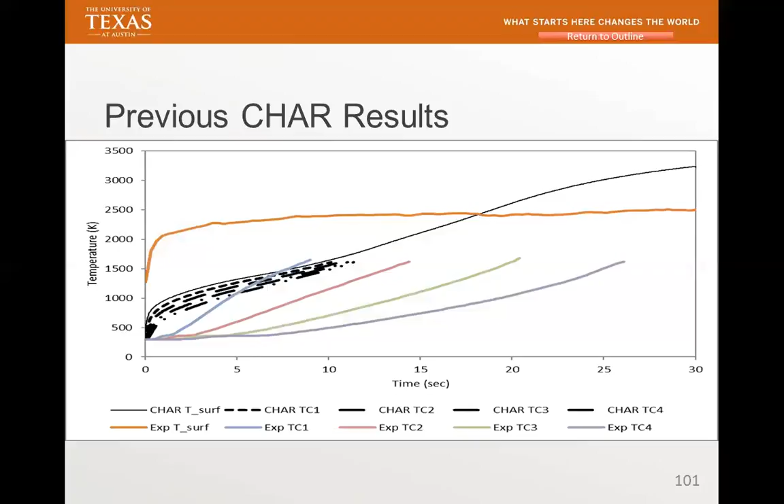But even 3D is time consuming. First of all, you need to generate the 3D grid. So it's not as easy as you thought. So this is what we do.

It's bad, okay? In this experimental case, it's vertical, nowhere close to what we expect to see, using a 1D model. So we're moving to 3D.

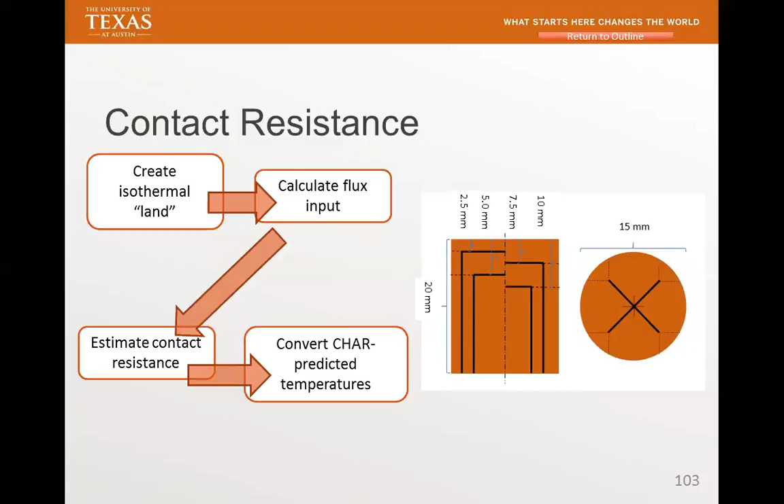Hopefully, these are the things he's doing called contact resistance. We're working closely with Johnson because Johnson is the agency who developed this code. They would like us to match some of these things we do in our lab with the computer code. So that's what we do, and we talk about all these parameters, and we're doing some sensitivity analysis.

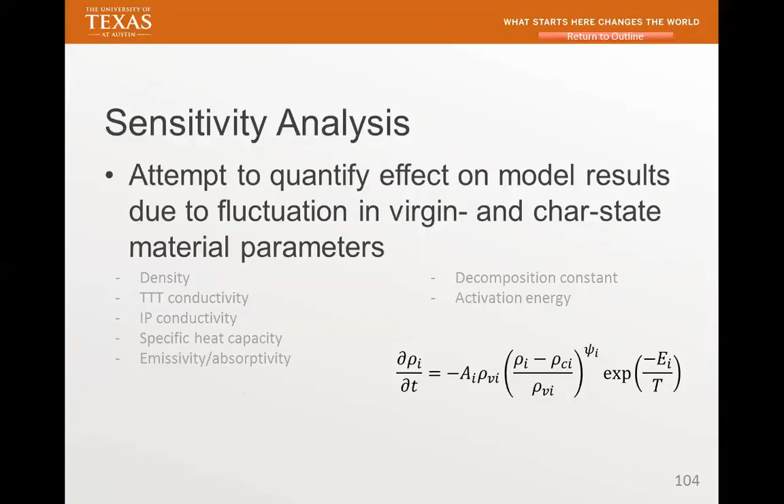And basically, using 1D, we cannot actually compare with experimental. And there's a lot of problem with the boundary condition because we actually cannot calculate the heat transfer coefficient of the acetylene torch. I think I found one of my colleagues who could do that. Okay, we cannot do that.

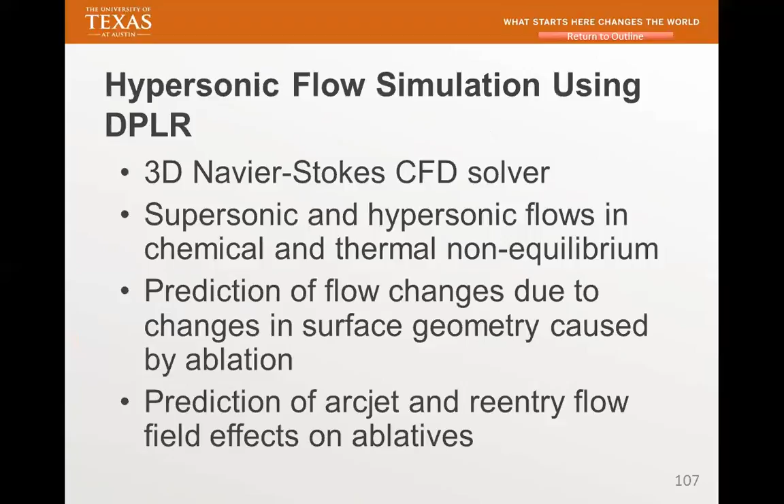Okay, these are things we do for conclusion and future work. Another way we're starting to look at actual 3D Navier-Stokes CFD, which is much further down. We would like to have the capability to do some of this analysis in my group, and we finish all these. We're doing that in general.

Last slide. We were able to present different things we do in terms of ablation. We have been able to make materials for solid rocket, and we were able to make material for TPS, and we developed the sensor.

Like I said, it's from another agency, AFOSR, and we were able to start coming up with material response modeling using FIAT, CMA, and char, and we were able to use OTB and ICP to continue testing this material. I think this is the part that costs a lot of money.

Thermophysical properties. The ones that we have are only for PICA and AVCOAT, and like carbon phenolic. We would like to use the char strength sensor to give you some information about the char strength.

We're going to validate our response model using OTB, ICP, and eventually we're going to couple that with CFD.

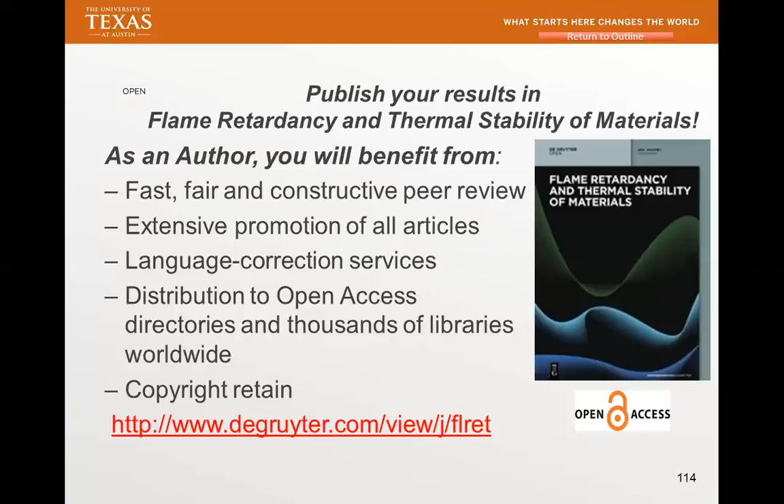And this is my book. And this is, what was the last one? Oh, this is the journal. I'm actually editor-in-chief. With that, I'm going to stop.